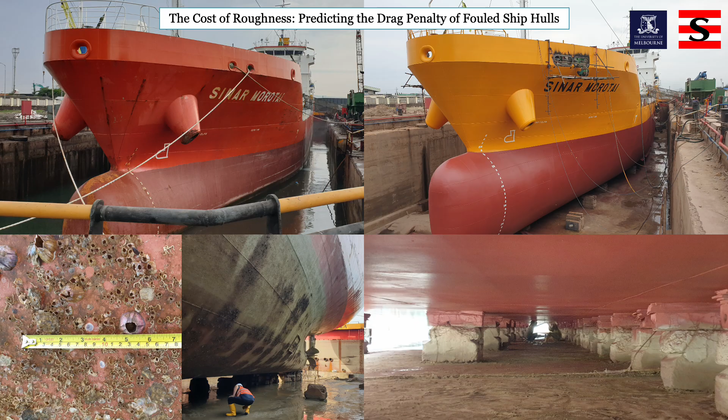I would like to present my progress report regarding my PhD topic: the cost of roughness predicting the drag penalty of fouled ships' hulls. So this slide is as an introduction.

On the left side, this is the ship before they replace the anti-fouling coating, and on the right side is the result, after a 5 year dry dock period. The goal of replacing the anti-fouling coating and cleaning the ship's hull is to restore the hull to a smooth surface, so the ship can reduce drag and improve fuel efficiency.

The next question is, when is the optimum time to clean the ship's hull? Do they need to wait until the ship is dirty, like on the left side here? Because let's say the ship starts getting dirty from the third year of sailing, they would need to wait and pay extra fuel for the remaining 2 years of sailing.

We can avoid this if the ship's operator has a function that, based on the measured topographical roughness, can predict the ship's drag penalty. This will answer when the optimum time is to clean the ship's hull. But the problem is we lack this predictive correlation, especially one that is scientifically approved.

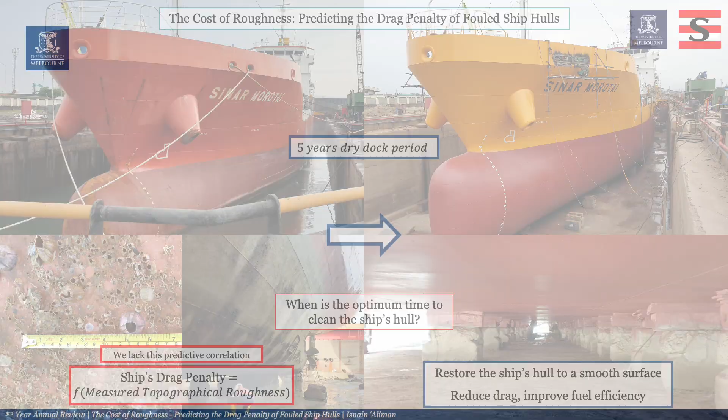To answer this problem, we have a research collaboration between Unimelb and Samudra Indonesia, the owner of the ship. The research objectives are first, to improve the predictive correlation of KS, or equivalent sand grain roughness, for realistic ship hull roughness, and second, to test and improve the full-scale predictive capability of laboratory experiments.

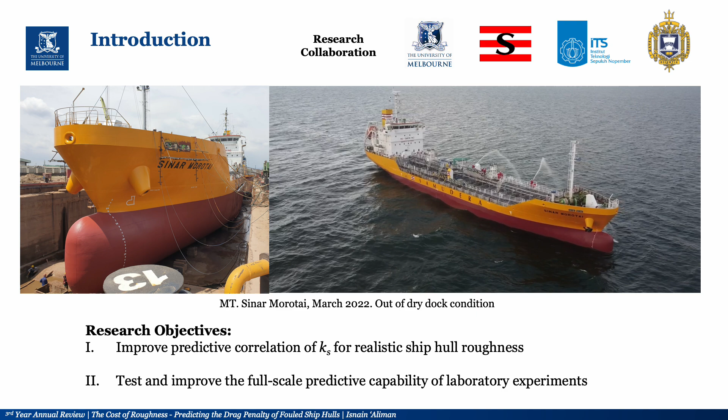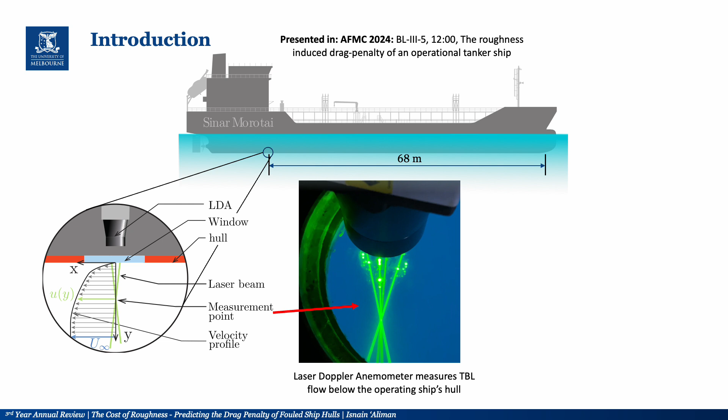So I just want to remind you that on the ship Sinar Morotai, 68 meters downstream, we installed a marine grade window as access for laser Doppler anemometry, so we can measure the turbulent boundary layer of the operating ship's hull.

And from this boundary layer measurement, we can calculate delta U plus, which directly tells us the drag penalty of the ship's hull.

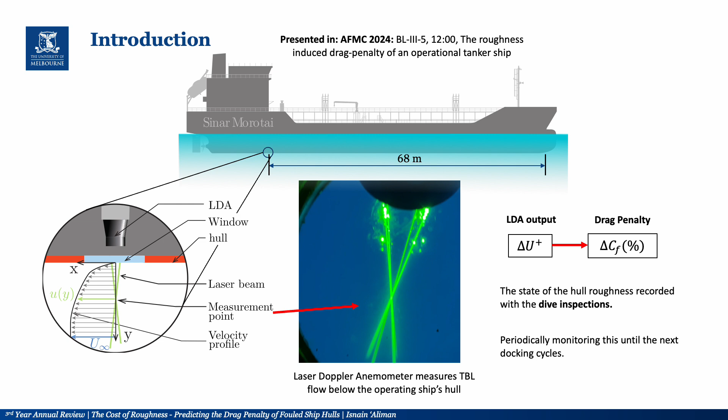The state of the hull roughness is recorded with dive inspections at every LDA measurement, and we periodically monitor this until the next docking cycle, for 5 years. Since dry dock in March 2022, we have 5 years until the next dry dock in 2027.

So thus far, until April 2024, we measured 4 times. On the left side this is the delta U plus, and on the right side it directly corresponds to the drag penalty of the ship's hull.

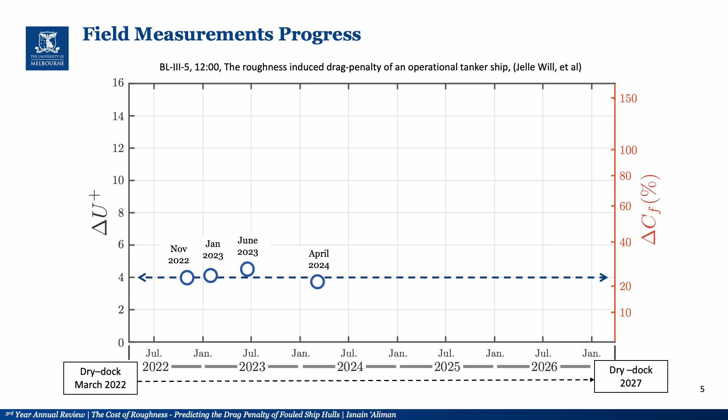Based on the dive inspections until April 2024, we saw no sign of biofouling, meaning the ship's hull remains clean.

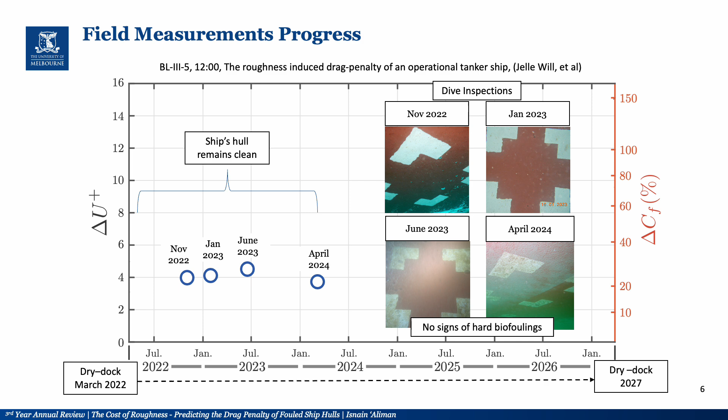From these LDA measurements, we see that on average the delta U plus is around 4, with plus minus 1.2 as the error margin for the measurements, and we call this the baseline drag penalty.

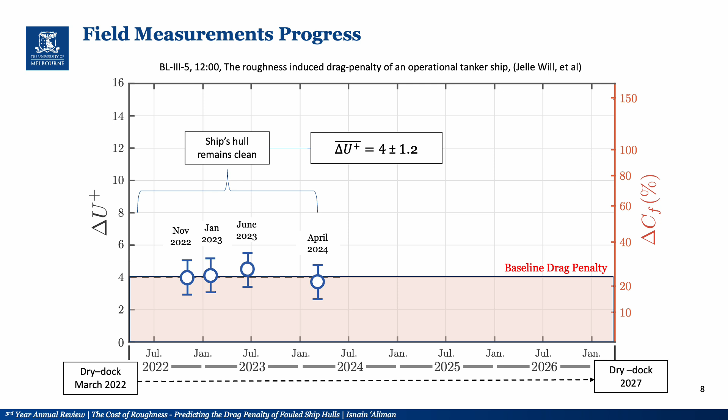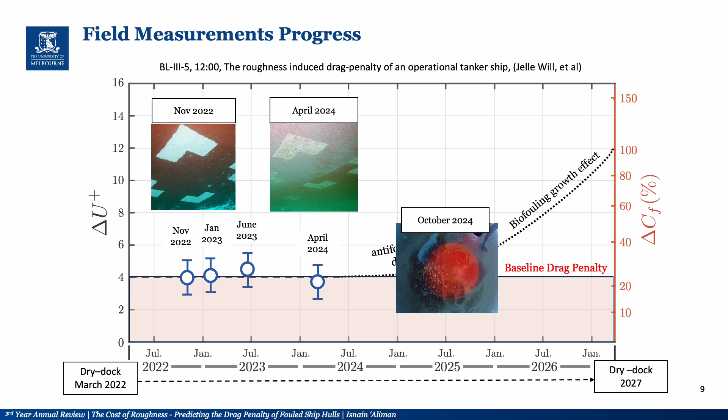In the following years, biofouling will grow on the ship's hull, and by October 2024 we also have evidence that biofouling is starting to grow on the hull.

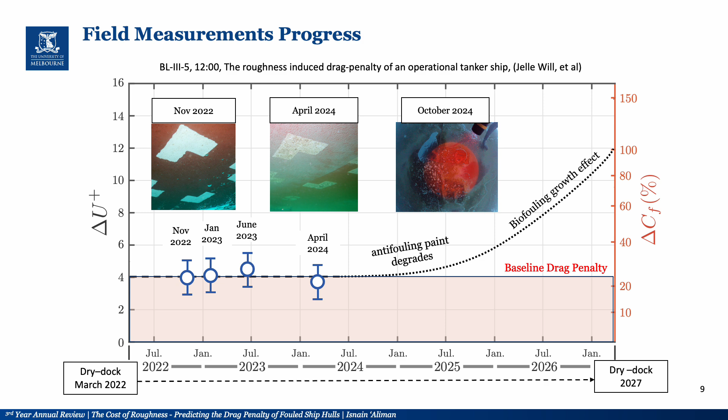If we continue measuring the boundary layer of the ship's hull, the delta U plus will increase, as will the drag penalty of the ship. So this is still the trajectory line.

The problem is comparing the biofouling growth effect to the baseline drag penalty. What's the meaning of this baseline drag penalty? It corresponds to a 25% drag penalty compared to a hydrodynamically smooth hull.

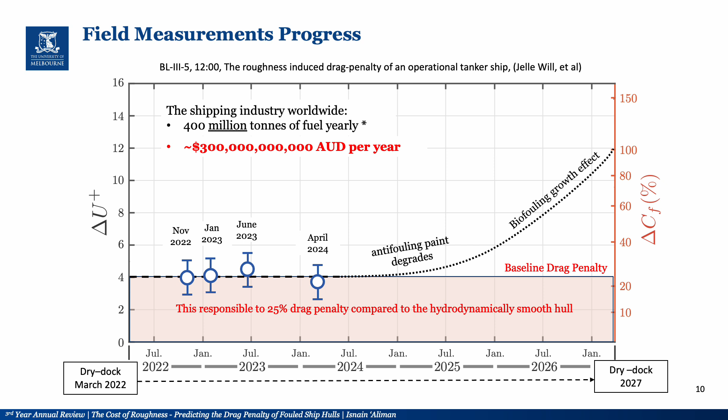So this baseline area is really big compared to the biofouling growth effect. The shipping industry on Earth consumes 400 million tons of fuel yearly, about 300 billion Australian dollars per year. Let's say this baseline drag penalty happens on all ships around the world.

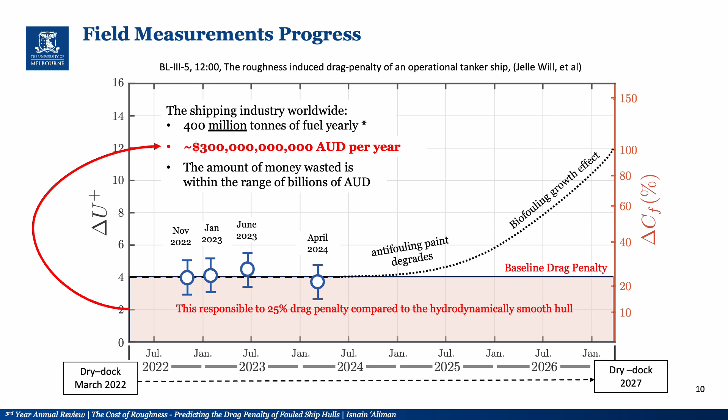So that means the amount of money wasted is within the range of billions of Australian dollars. So it's big effects. So the question next is, what's causing this baseline drag penalty?

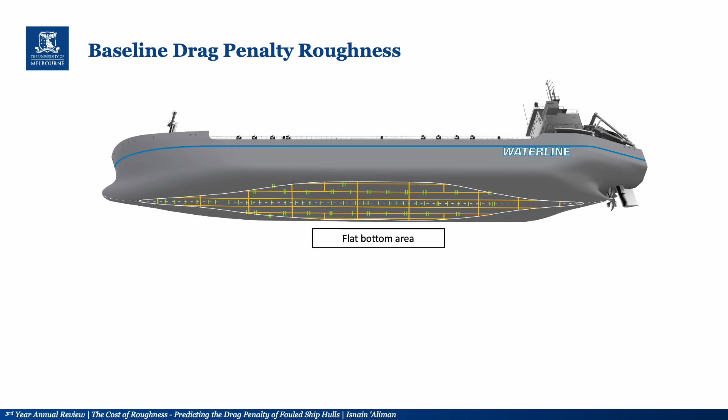This is from the flat bottom area, below the ship's hull, and at the flat bottom area we can see there are 3 major sources of roughness below here.

First, start from the paint job roughness, it's all in everywhere, just from the paint job finish. Second is the weld seams, indicated with these yellow lines, and the last is docking blocks, indicated by the green squares here. So what are the docking blocks here?

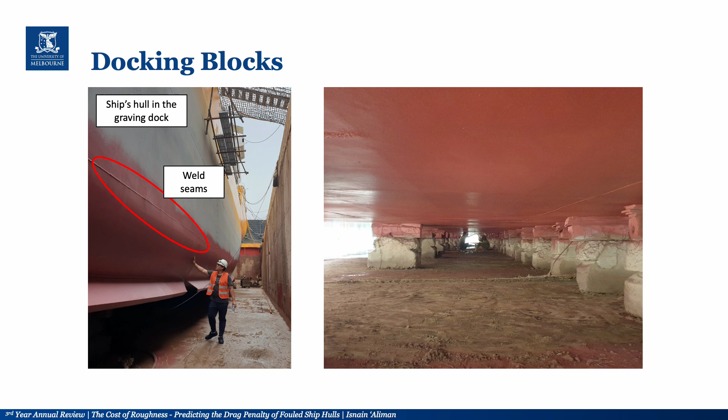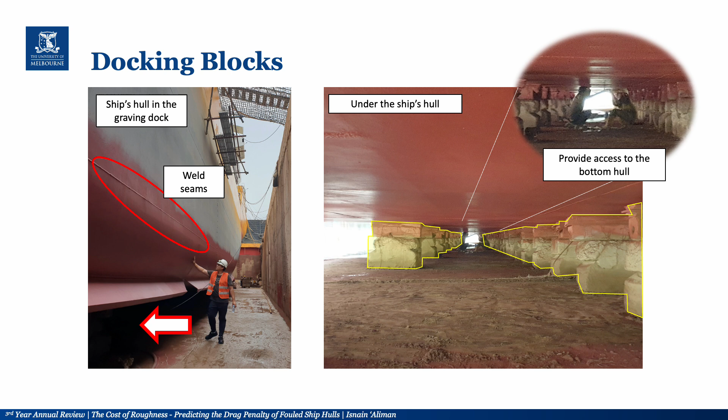So if we reverse back to the dry dock period, this is the ship's hull in the graving dock, and we can see that the weld seam is big. And then if we compare, this is the photo on the right side under the ship's hull, and these are the docking blocks.

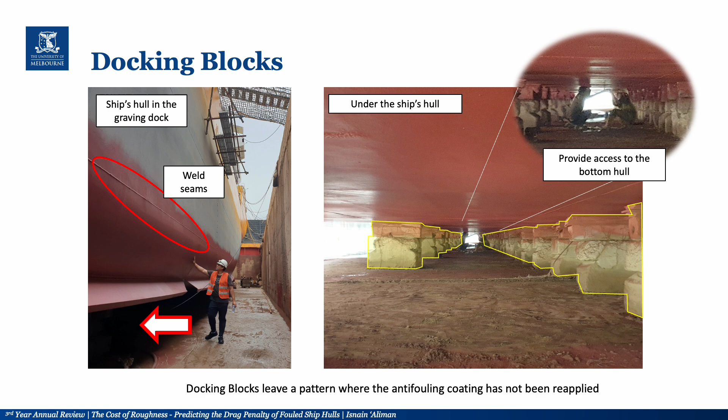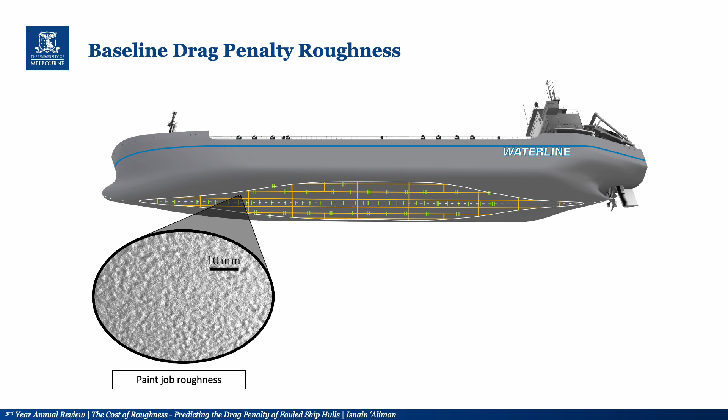So the docking blocks provide access to the bottom hull, so the cleaners can clean and repaint the ship's hull. The problem is this docking block leaves a pattern where the anti-fouling coating has not been applied.

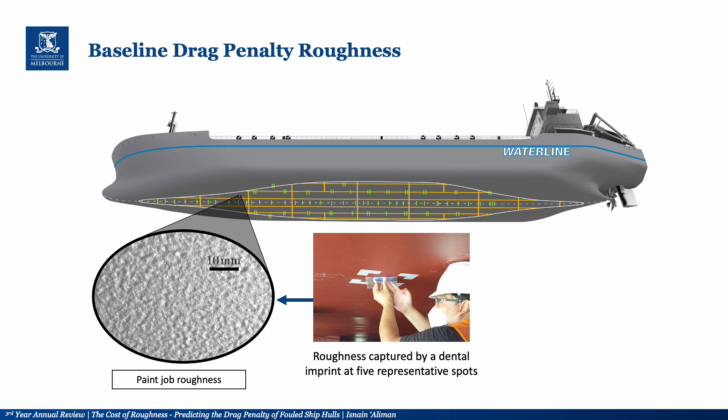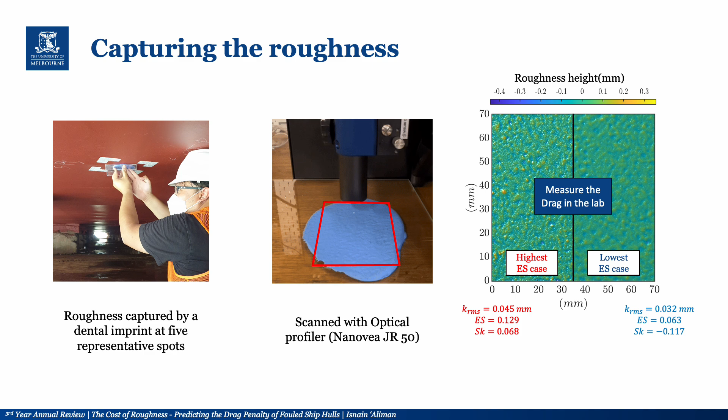So we capture this with dental imprints at 5 representative spots, and we scan these imprints with a Nanovea optical profiler, and we test from 5 roughness. We choose 2 based on the highest effective slope case and the lowest effective slope case, and we measure the drag in the lab to know the drag penalty contribution.

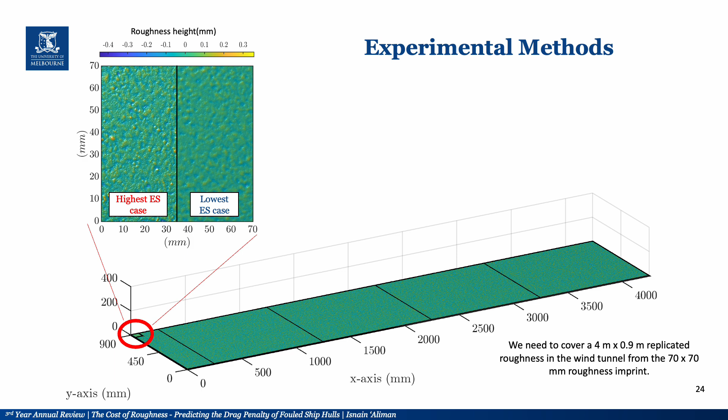So this is the size comparison of the imprint. We need to expand this roughness to fill the entire wind tunnel area, so I need to scale up, tessellate and manufacture with the CNC machine, and at 3.8 meters downstream at the wind tunnel I measure the drag with drag balance and hot wire measurements.

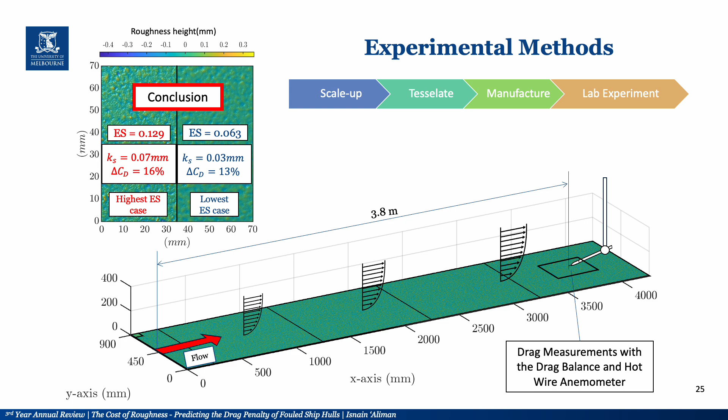And the conclusion is, for the lowest effective slope case, it contributes to 13%, while the highest effective slope case contributes 16% drag penalty.

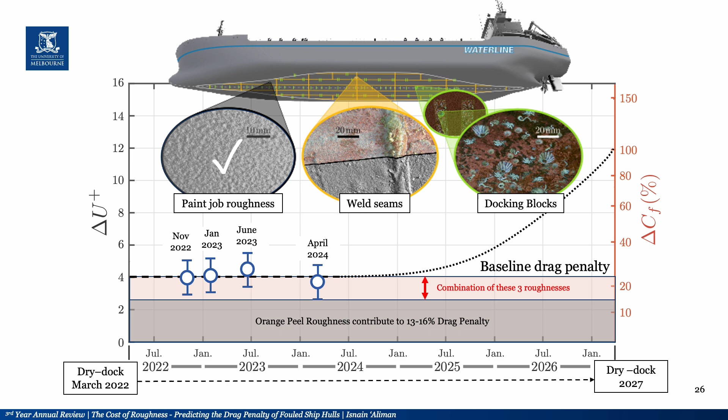So from this baseline drag penalty, we've just answered that the orange peel roughness contributes up to 16% drag penalty, and the remaining difference between what we found on the field and in the lab should be the combination of these 3 roughness: paint job, weld seam, and docking blocks.

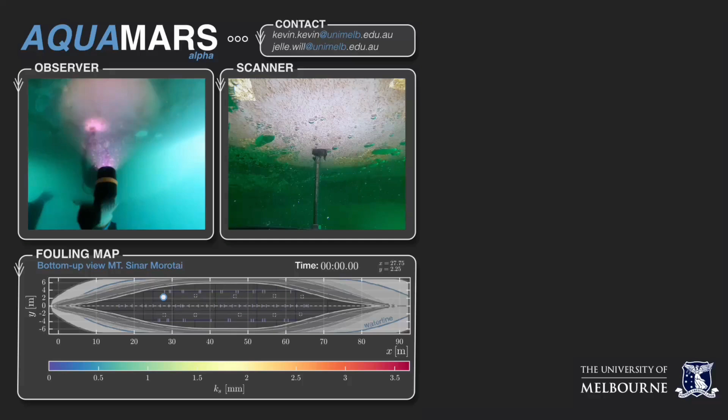So to answer this, we need to know the case of these roughnesses. Besides the LDA measurements, we also do a dive inspection, so we send the divers to operate multiple cameras, including the 3D scanner.

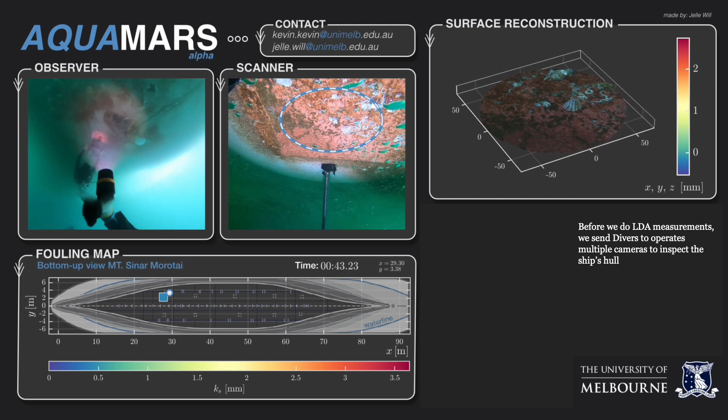So on this video, this is the diver scanning these surfaces, and from the 3D scan here, we can generate the roughness statistic from the surface scan of the ship's hull.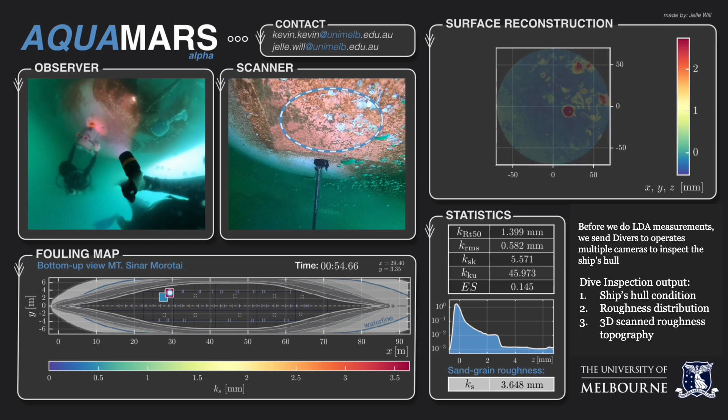So the output from this dive inspection is, first, the ship's hull conditions, because from this video we can analyze and say whether the ship's hull is clean or dirty. Second, we can get the roughness distribution, because all of the footage we have, we know the exact location it came from. And last, we have the 3D scan roughness topography, for this one as the example.

So the next question is, how rough are they? We can try to estimate how rough they are with existing predictive correlations such as Forooghi et al. 2017. But the problem is, is it accurate? Can we use this equation for ship's hull roughness?

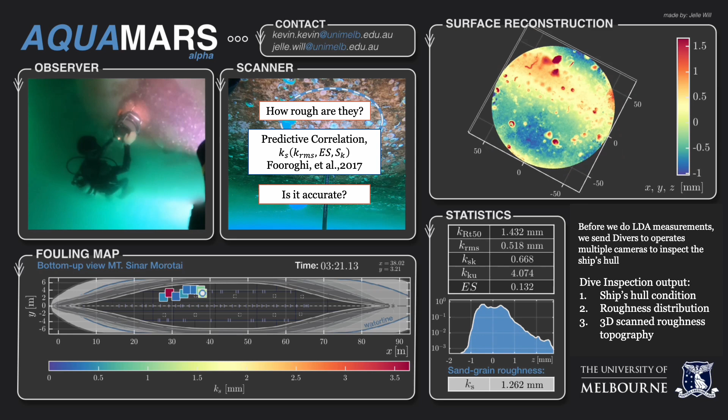So to answer that, I reconstructed all of the 3D scan surfaces on the docking block because it's rougher faster, and I compiled these scanned surfaces based on effective slope and skewness. So here's the effective slope versus skewness plot, and this is the orange peel area, and then I plot all of the scans here on the plot in chronological order.

So let's also put the dry dock roughness as an example here. Most of the docking blocks area are lying on this red area, and on the blue one, this is not on the docking blocks, but we got this from the sides. It's still a biofouling roughness.

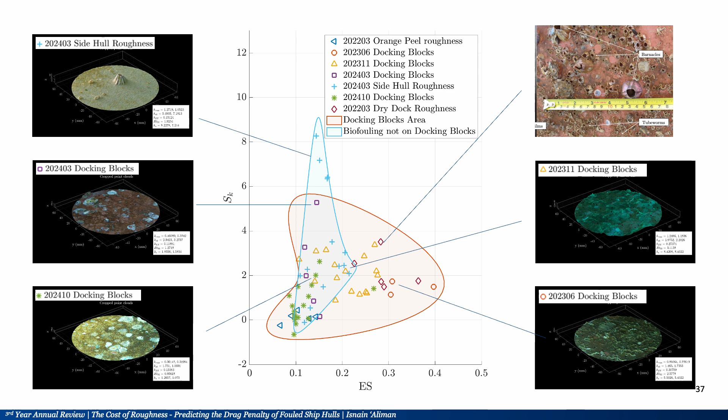So to answer how rough these roughness are, let's try this predictive correlation from Forooghi. But the problem is this predictive correlation is built from this area, so we can use Forooghi, but the parameter studied or training data to build this predictive correlation is not wide enough to answer the ship's hull roughness.

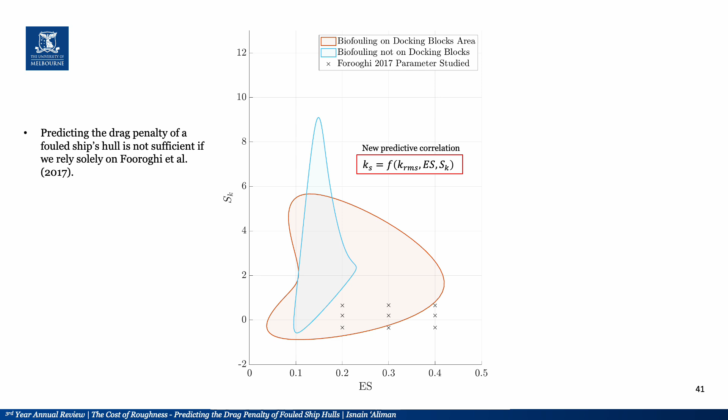So it's not enough, which means we need a new predictive correlation. I plotted all of the existing parameter roughness studies, and if I build a new predictive correlation based on the roughness humanity has tried to study, the problem is still not enough, because the existing roughness study does not cover all of the roughness statistics from ships.

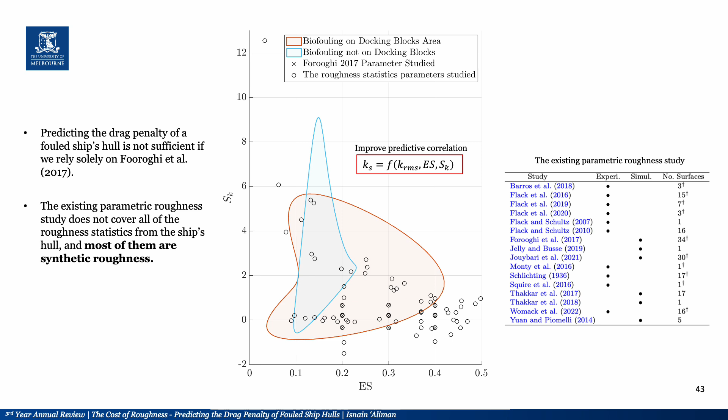Most of them are synthetic roughness, so most of them are not real roughness. So I need to improve this predictive correlation to answer how accurate the predictive correlation is.

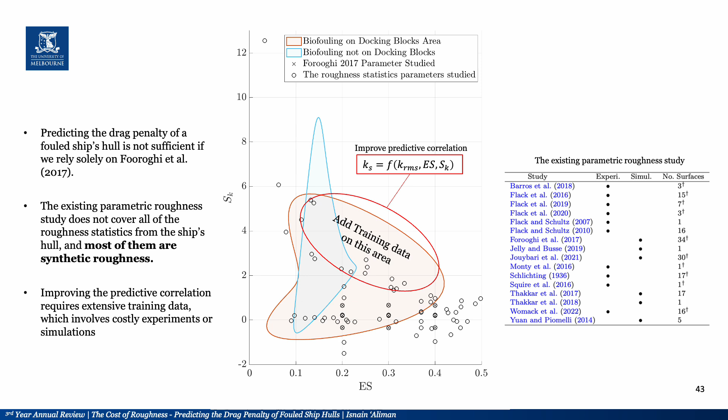So at the end of my study, I need to add more training data in this area. But the problem is it's challenging, because every single point here requires extensive training data, which involves costly experiments or simulations. So from our surface database, I choose to select one to be tested in the wind tunnel.

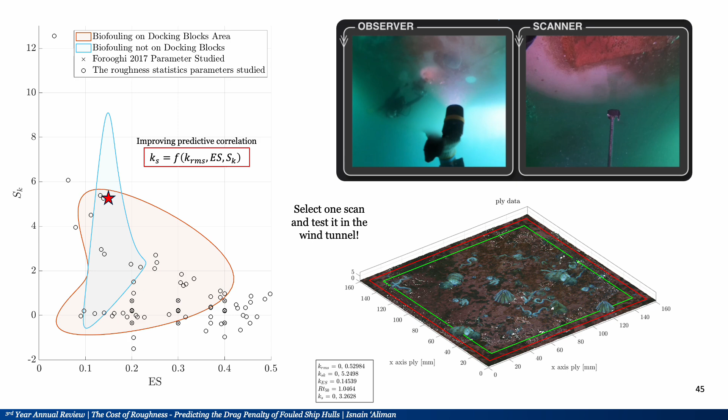I chose this surface, and this is the video when the surface was taken. On top of it, this is the Z or elevation profile, the elevation map.

By adding roughness elements on this surface, it will shift the effective slope and skewness parameter space to the right side over here. And when I keep adding more roughness elements here, it will stop at this point.

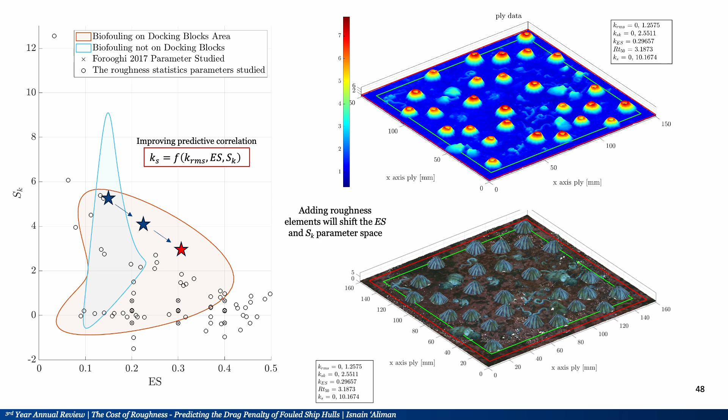So currently, what am I doing in the lab? I'm trying to measure the drag of this surface, from the super rough surface covered with a lot of barnacles, using drag balance and hot wire anemometry.

So by reducing the roughness elements in this measurement, let's say if I remove half the population of the barnacles, it will expand the range of parametric roughness studied. So when I keep removing roughness elements, retest it, and keep removing and testing, the outcome from this experimental method will be beneficial to improving the predictive correlations.

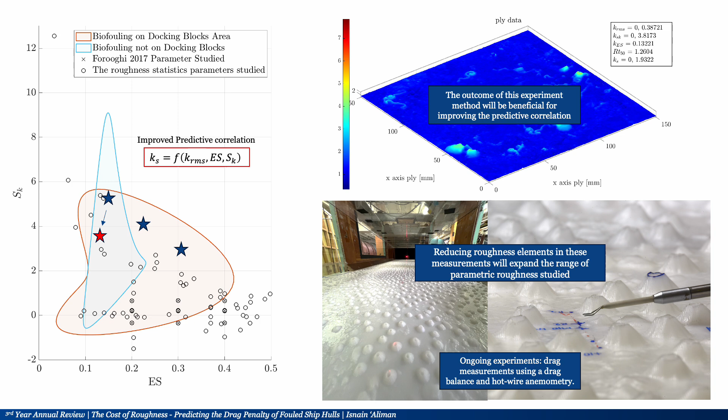So from this improved predictive correlation, let's say now I will have more confidence using this to answer how rough the combination of weld seams and docking blocks is. So this will indirectly answer that question.

The first is to improve the predictive correlation of KS for realistic ship hull roughness, and also the second research objective. This will also directly help test the full-scale predictive capability of the laboratory experiments.

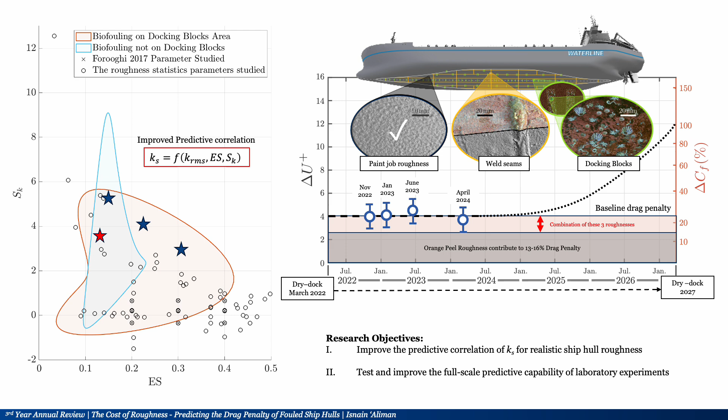So regarding my fourth-year research plan, on the fourth-year agenda, I'm still doing the last case of laboratory experiments. I just need to finish this, and it's planned to be finished at the end of this month.

And then after that, I just need to synthesize all of the outcomes from these experiments into my thesis. At the end of this year, I'm planning to submit my thesis.

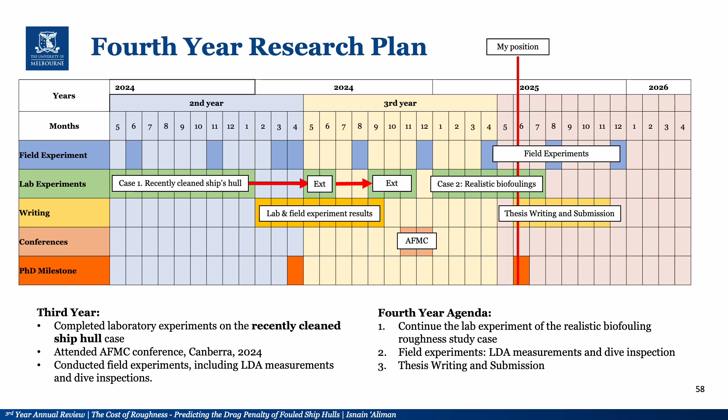About the thesis writing progress report, to be honest, I don't have much progress because I'm still busy with the lab experiments. After this, I will continue to focus on writing.

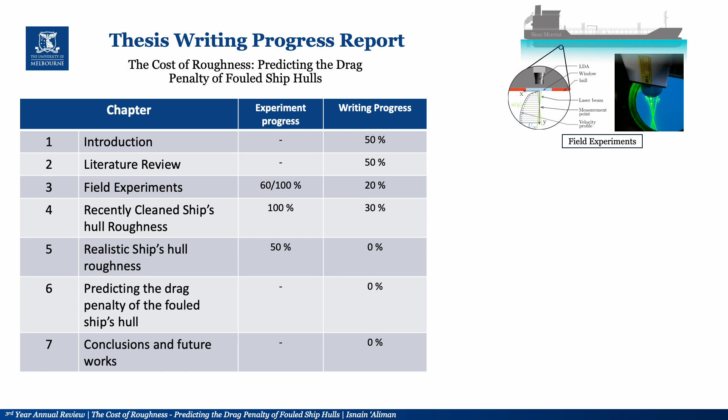But actually, there are three major experiments. First is field, and then recently clean ship's hull, and this is the ongoing experiment. For the field experiment, it will cover most of my thesis chapters, and for the clean ship's hull or the orange peel, it will cover chapter 4 and chapter 5.

And for the ongoing experiments, it will be involved in chapter 5 to chapter 7, especially to improve the predictive correlations and to validate the ship's hull drag penalty at full scale. So yeah, I need to complete this immediately.